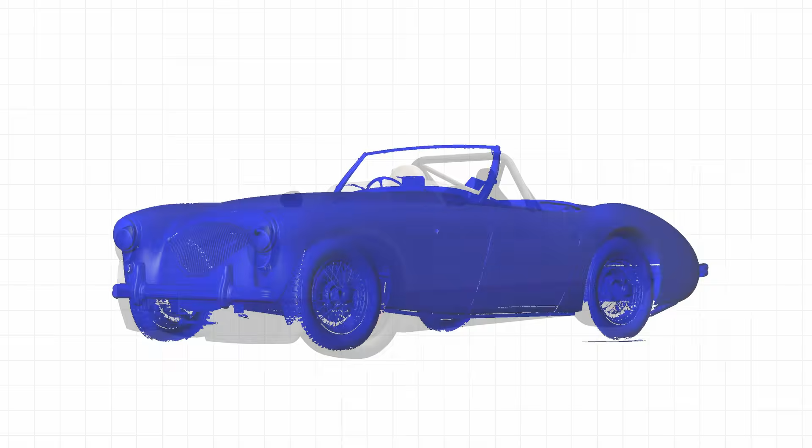G'day, I'm Dr. Kev, and we've been designing a car based on 1950s sports cars. In the 1950s, sports car designers were focused on trying to reduce drag of vehicles. This ended up with streamlined looking cars. But these cars look very different to the cars of today that make good use of aerodynamic tools and analysis. So I needed to know, could you still make a 1950s inspired car that had reasonable aerodynamics for the road?

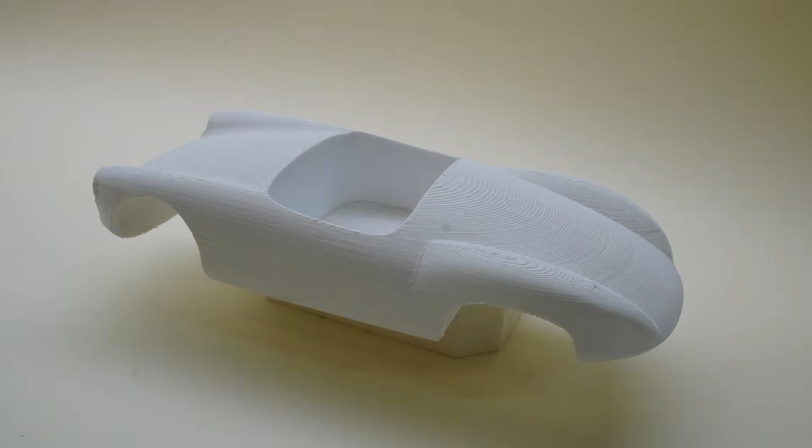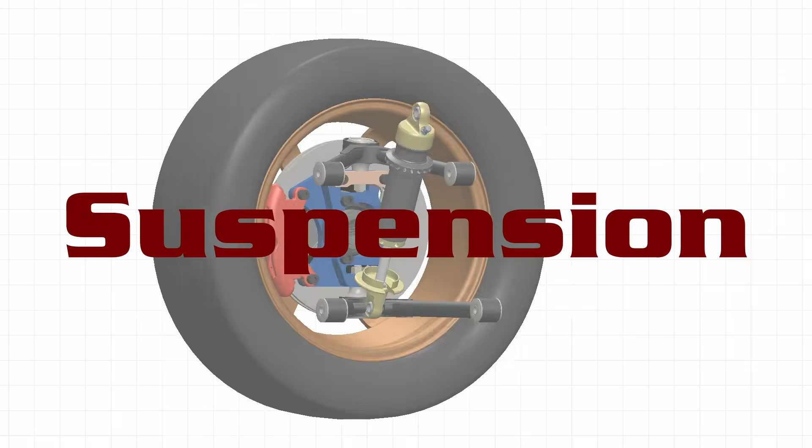Early in the process of designing Project 171, I developed a few car body shapes to investigate whether I could do the modelling process and pull off something that was going to look close to a 1950s sports car. But since those early efforts, I've mainly been focused on the internals of the vehicle, things like the suspension, the structure, the arrangement of all of the components, including things like the ergonomics. I figured that I needed to sort this stuff out before I could go back to working on the bodywork.

There was no point trying to design bodywork with dimensions that were just not going to work with an overall vehicle. The plan was definitely to go back to the aerodynamics and spend a fair bit of time trying to figure out the design of the vehicle, but the plan was to do that quite a bit later. That is, until I got contacted by the good people at AirShaper. Now, if you don't know, AirShaper is a company that offers CFD services online. So CFD being computational fluid dynamics. And this is a way to simulate the aerodynamic performance of your vehicle.

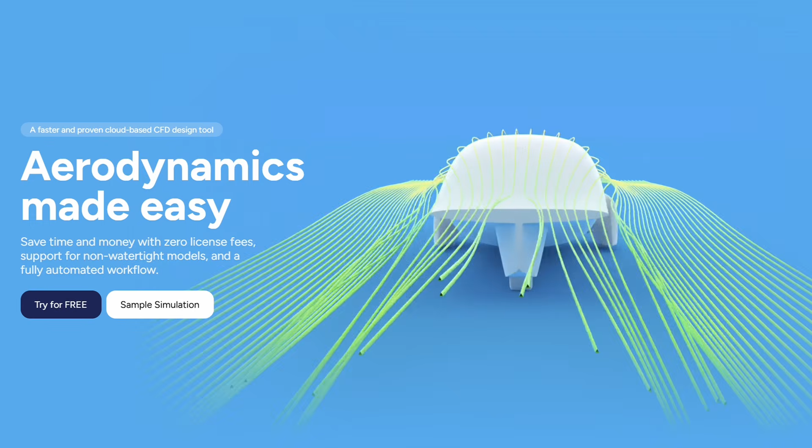If you follow some of the same YouTube channels that I do, you would have seen Superfast Matt has used AirShaper in the design of his high-speed vehicle, as well as Robin Shute with his new hill climb car. I had intended to give AirShaper a go at some point, so when AirShaper contacted me, I thought this is an opportunity that's too good to pass up. The only problem was, I didn't really have a model that was suitable to run in the simulations. A lot of the earlier bodywork that I had created no longer fit with the internals that I'd been working on. But unwilling to let the opportunity pass, I thought, let's give it a shot.

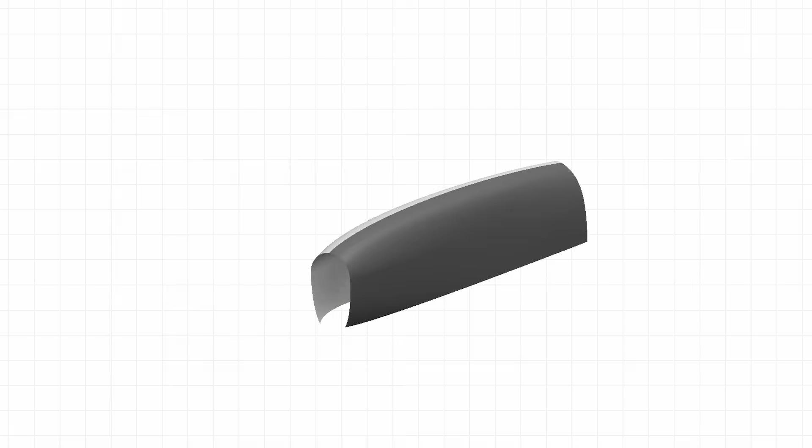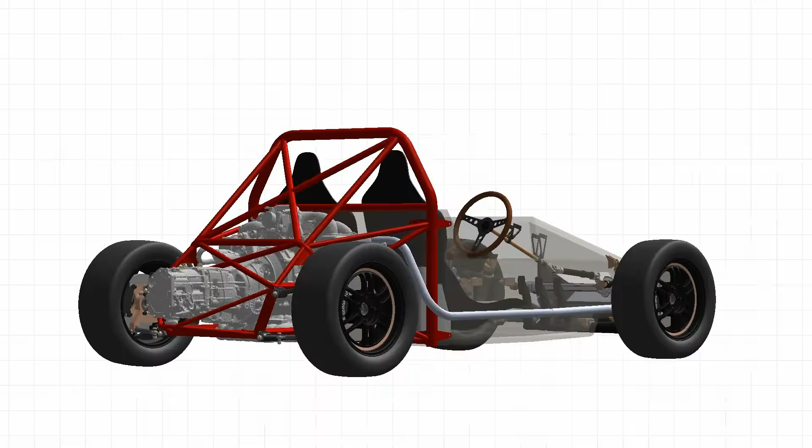So I went away and spent a fair bit of time modeling a body that was closer to where the thinking of the project was at the time. This was informed partly by the scan that we had done of the Austin Healey, as well as the early bodywork designs and the work that we had done on the structure of the vehicle. In a phone call with AirShaper and their CEO, Wouter, I was encouraged to put as much detail in the model as I could. Now, I was fairly doubtful of this. I have done some CFD in the past, and generally, I've had to use models that have got reduced complexity just so you can get a decent mesh.

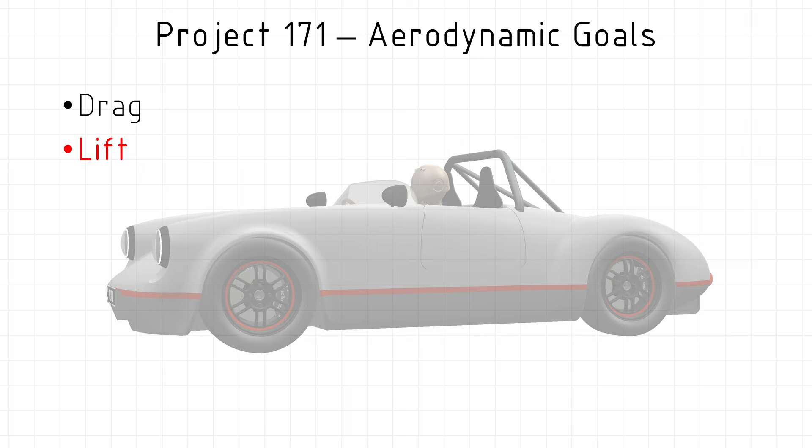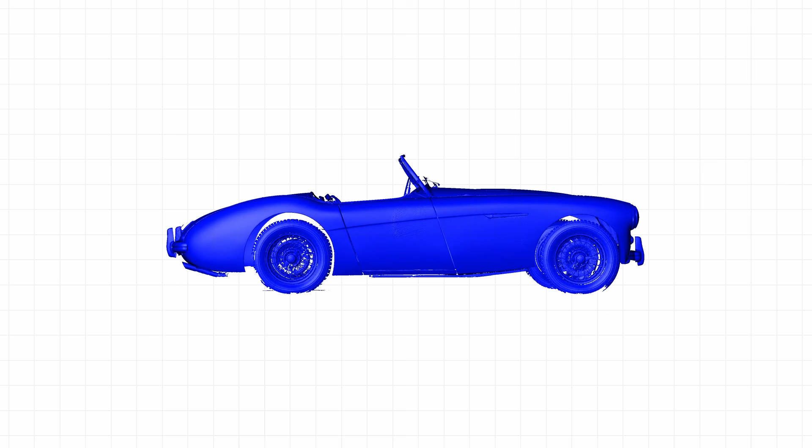Now, I have a few aerodynamic goals for Project 171. If we look at the top level, we can think about drag and lift. I wasn't really worried about drag. This is a car that's not intended to be a competition vehicle, and it should have more than enough power to have reasonable speeds. When it comes to lift, however, I'm a little bit more concerned. So a lot of the 1950s and 1960s vehicles, while they were designed for low drag, they didn't really have much consideration towards lift. And if we look side on, a lot of these cars have the rough general shape of an airplane wing. What that means is a lot of these cars had considerable lift.

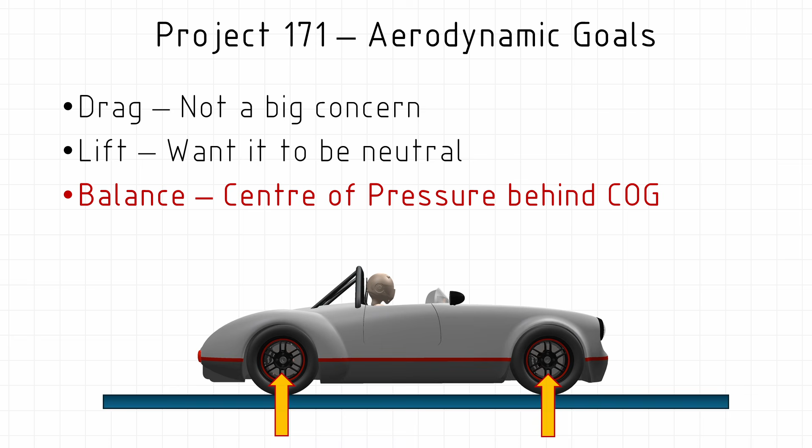Now, lift also has an effect on balance. So if we have a fair bit of lift at the front end of the car, we can lose steering authority. If we have a fair bit of lift on the rear end of the car, then we can have a car that will oversteer at speed and become quite unstable. So when it came to lift, I wanted to make sure that the vehicle was fairly neutral, didn't really have lift, didn't really have any downforce, and if anything, a slight amount of downforce with more at the rear than at the front. Now, another issue that I was concerned about is yaw stability at speed. But this is something I'm going to leave for another video.

Now, one thing I was very concerned with was the noise and turbulence that would be hitting the driver's head. Having gone on long trips in a 1950s sports car, the Austin Healey, it can be quite noisy and you feel a fair bit of turbulence on your head. And this takes away from the enjoyment of the drive.

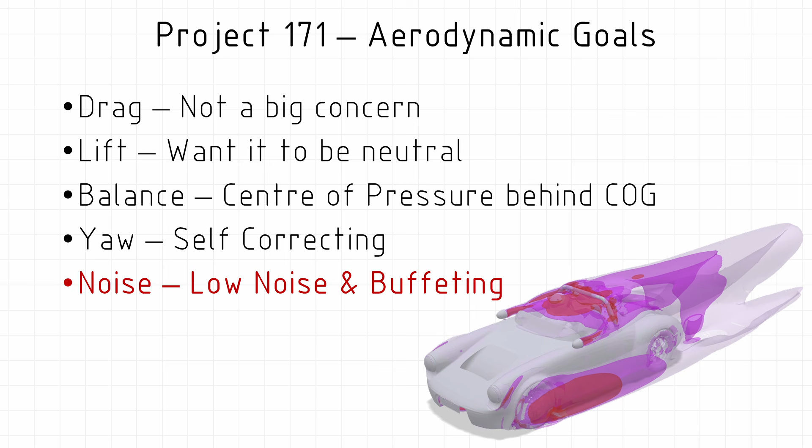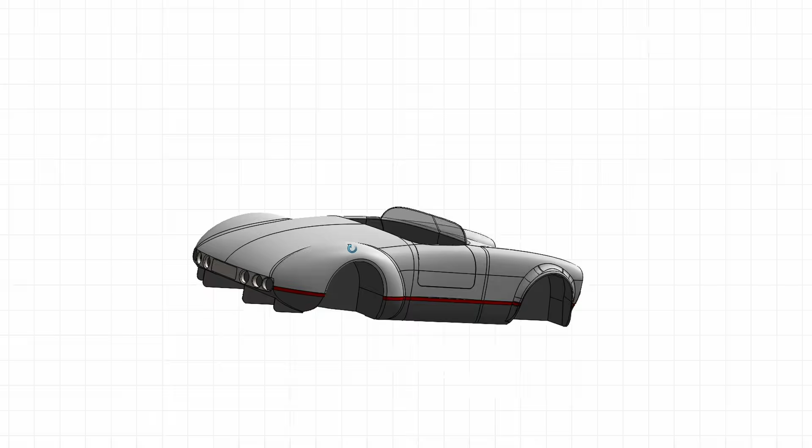So I thought a really good starting use for AirShaper was to see how close was I going to be to these goals. In order to start the process online, they needed to upload an STL. That's a type of 3D model, and it's reasonably easy to export that from SolidWorks. When modeling the bodywork, I did take some time to make sure that it was all watertight and suitable for scaling down and 3D printing. This meant that the bodywork was a reasonably straightforward shape to do some analysis on.

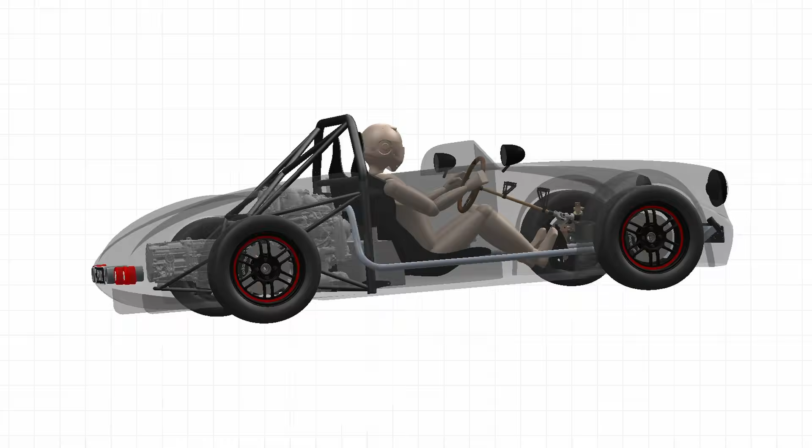But I wanted to test Wouter's claim about just building in complexity. So when it came to all of the other parts of the car, I just exported the STL of my main assembly. And this STL is an absolute jumble. It's got absolutely everything in it. It's got the suspension in it. It's got little pipes that I'd been running, the whole lot. It wasn't a specifically made CFD model. I was fairly confident that I was going to have to come back and simplify this model to make something more suitable to upload.

Once uploaded, there's only one real setup page to go to. You choose the simulation type, so is it on the ground, above the ground, static, moving, is it in air or water? All of that is fairly self-explanatory. And then there's a choice of velocity. Now, given that this is a road car and a fair amount of the time you're just going to be cruising, I thought I just want to see this car straight ahead at 100 kilometers an hour, which is a fairly common speed on the roads around Perth.

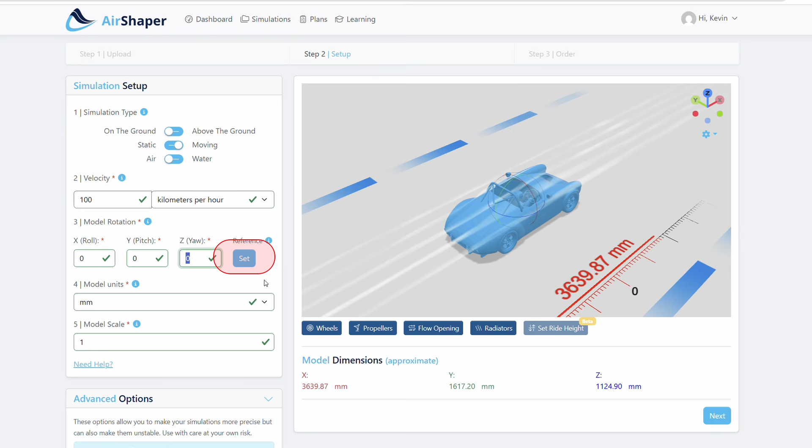Now, when I had imported it, the car was facing the wrong way. So I needed to rotate the model. Now, it's pretty important that you set the reference of this after you've rotated. And I can't tell you exactly how I know this, although I do have results of the car traveling backwards. The only other things are model units, so millimeters, it's the only real unit that makes sense, and the overall model scale.

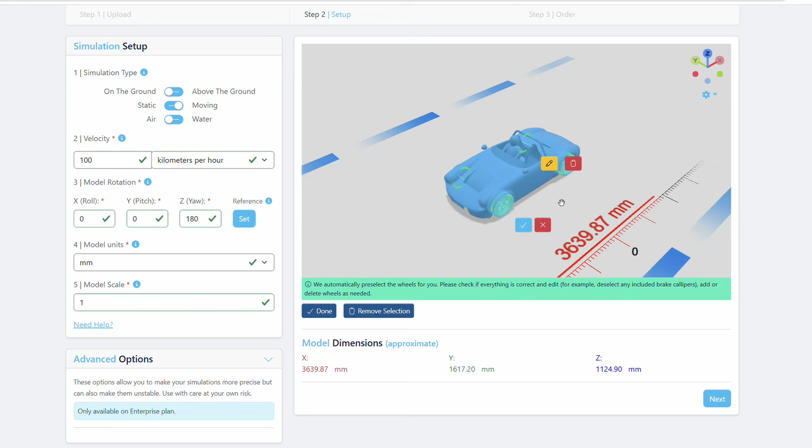Now, there's a couple of other things that I wanted to define. First, that this will be able to auto-detect wheels. Now, as I said, the model as it was uploaded was pretty complex. It had the suspension and everything in there, and I was fairly doubtful that it would be able to pick out the wheels reasonably easily. But I was pretty surprised. It was straightforward, selected the wheels, rotating in the right direction, and rotating at the right speed.

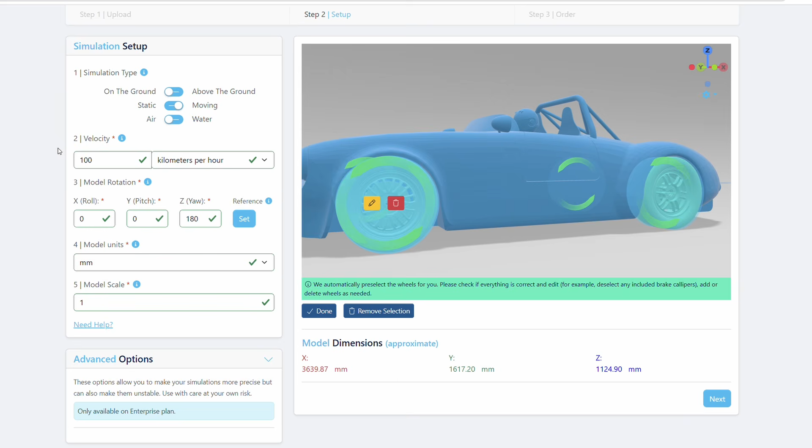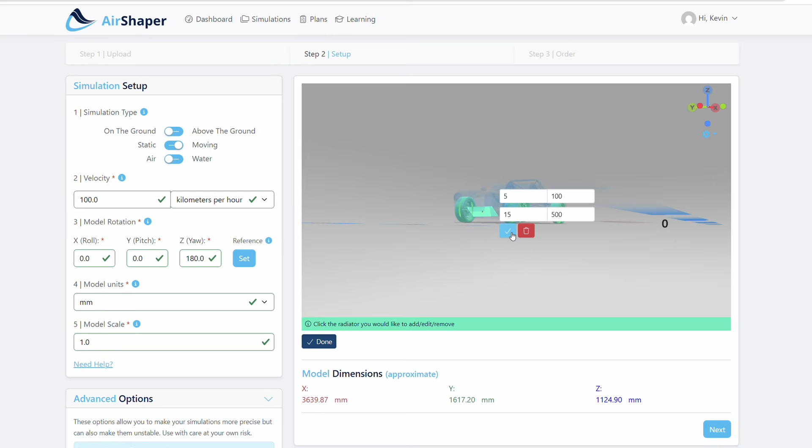Now, the only other thing that I wanted to define was the radiator at the front. I was fairly keen on seeing how the air would move through that ducting, especially how it would interact around the windscreen and driver and so on. So for this, you need to define two velocities and a pressure drop for each. I didn't have very accurate numbers there. I just went on something that seemed reasonable from the internet, but that's something that'll have to be updated as we get a bit more detail on what the radiators are likely to do.

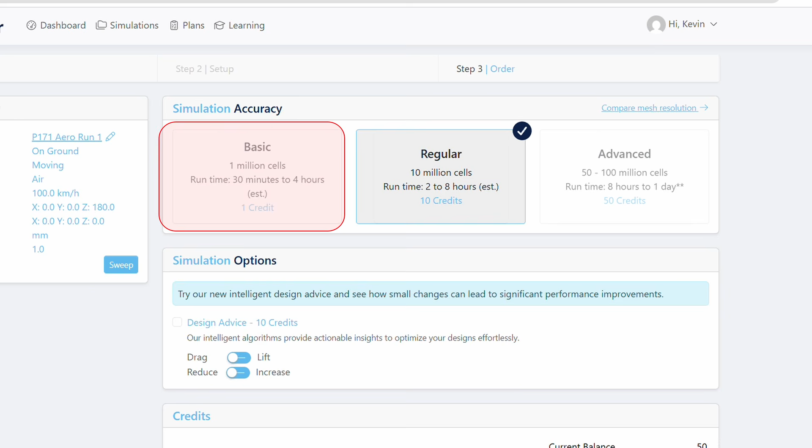The next step is to order the simulation. And there's a few options here. So there's a basic accuracy, a regular accuracy, and an advanced accuracy. And each of them costs a different amount. So a basic run is 1 credit, a regular run 10 credits, an advanced run 50 credits. And that is based on the number of cells in the CFD. These number of cells is how much the air is broken down into. If we break it down into more cells, we can get a more accurate simulation.

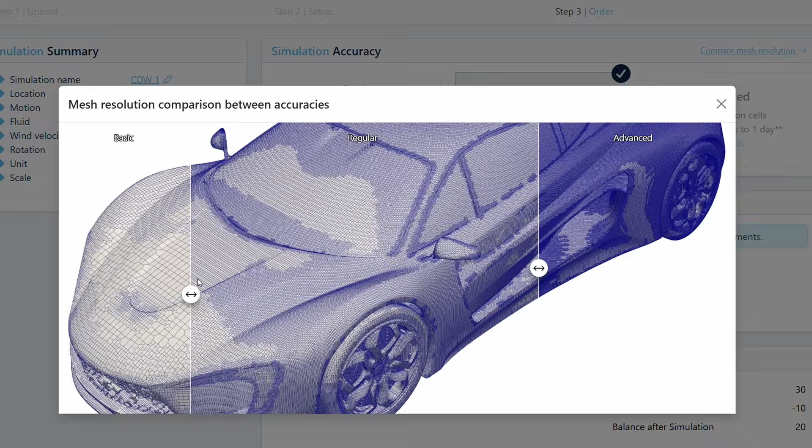Now, given there was a fair amount of detail, I thought I'd go with a regular run, also noting that this is pretty early on in the design process, so there wasn't really a need to waste the resources of doing a particularly long run. Now, I probably could have got away with using a basic run at the beginning, but I really wanted to see what this software could do. Now, there was another option, which is to do some design advice, and that's where you could get the software to tell you what areas of the geometry need to change to reduce or increase drag or lift. So I just kept it simple, put it on regular, started the simulation.

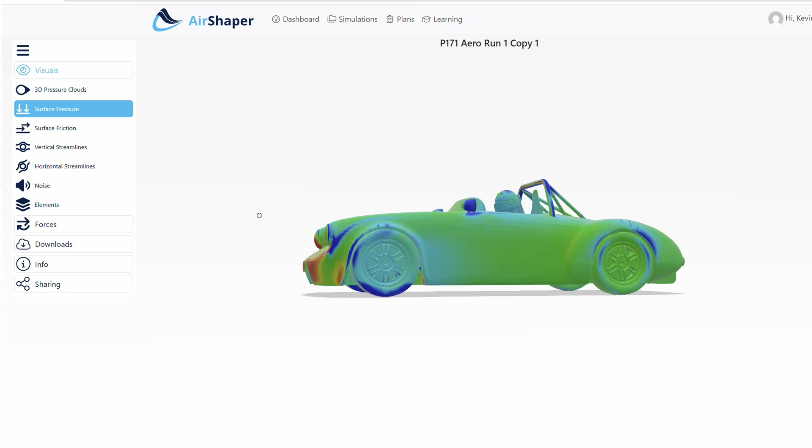Now, this is a pretty complex calculation and it takes a fair bit of time, and the run time for the first simulation was between 2 to 8 hours. And when I opened it up, I couldn't believe that it had just worked. All of the issues in the past with CFD have really involved trying to get a decent mesh and getting that to run. This just worked.

It had rotating wheels, it had a radiator in it, it had reasonable results. Having done this sort of stuff in the past, this just blew me away. And there's pretty good results that you could view once your simulation is complete.

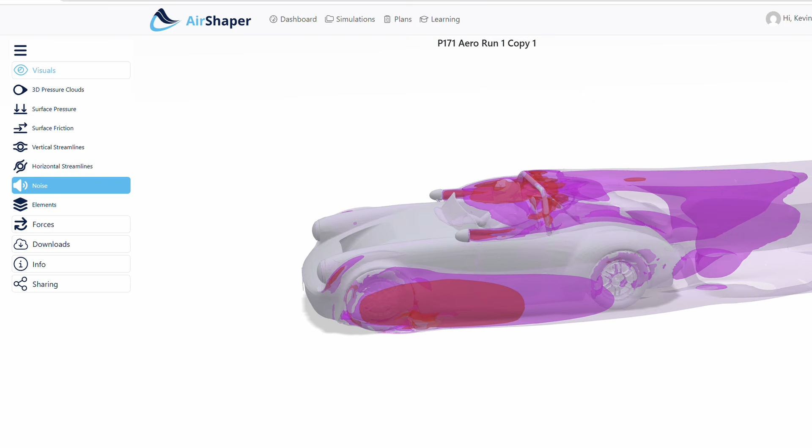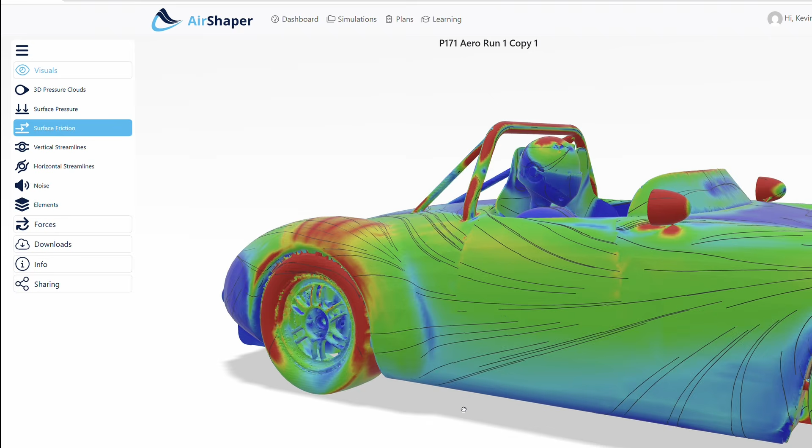If we look here, this is the surface pressure, and this is showing areas that have high pressure and areas that have low pressure. We have surface friction, and we can actually see how the flow is traveling over the body of the vehicle. Now, this would be really good if we start to look for areas where there might be separation or sort of laminar flow and start to do some on-car testing once this thing is completed to see whether these patterns are matching up in real life.

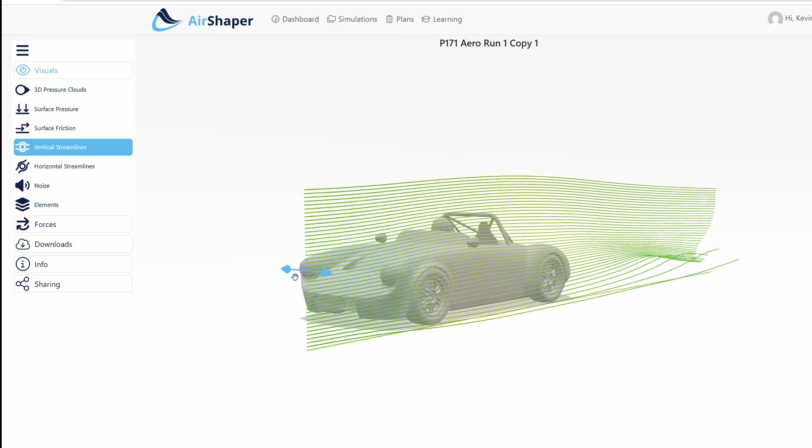We can show some streamlines of this and how the air is traveling. Well, this is an area where I'd really like to just be able to select something like the radiator area and just show the streamlines for that. Otherwise, with this resolution, it gives some idea of what's happening. You can see some areas of separation, but I didn't find this to be as useful as some of the other outputs. Now that can be done both vertically and horizontally. It does give you a good idea of where the air is traveling.

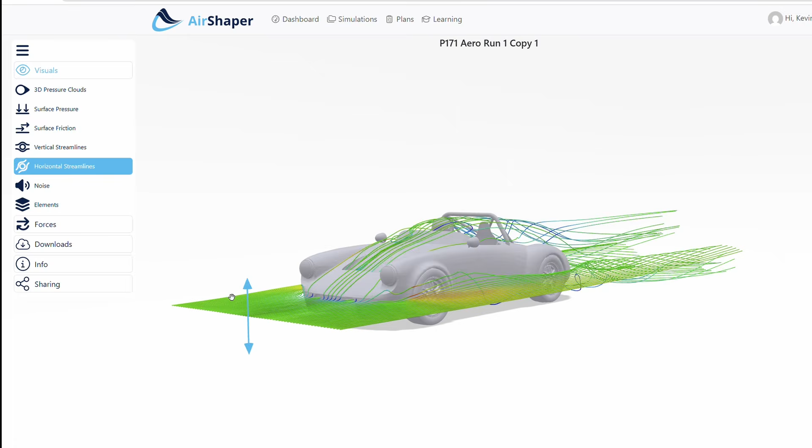Now of more interest is the 3D pressure clouds and the noise. So we see with the 3D pressure cloud, this is showing regions where there's a big transition to a low pressure region. And we see that the noise is actually doing a similar calculation of this. So this is a static simulation. So the noise here, this is an approximation of the noise, but it gives you an idea of where the noise is going to be.

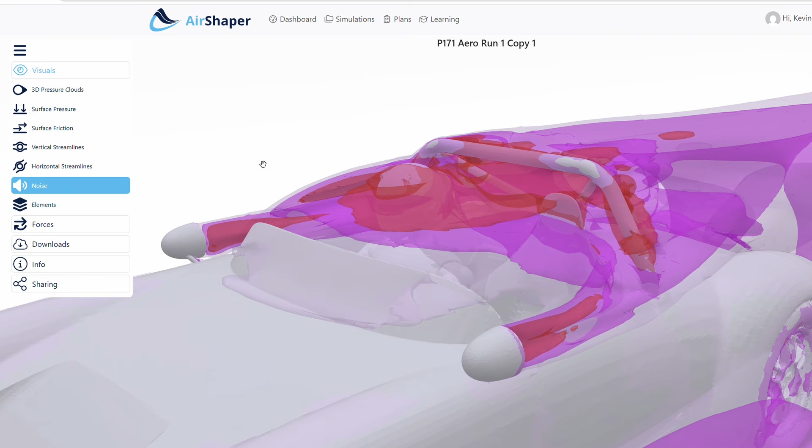And unfortunately, one of the design goals was to try and avoid noise being at the driver's head. And if you look here, the driver's head is right in a big mess of noise. In fact, if we go back to the surface friction thing, we also see a fair bit of surface friction on the driver's head. So yeah, not a really fun experience for the driver in this car at the moment. So something to work on.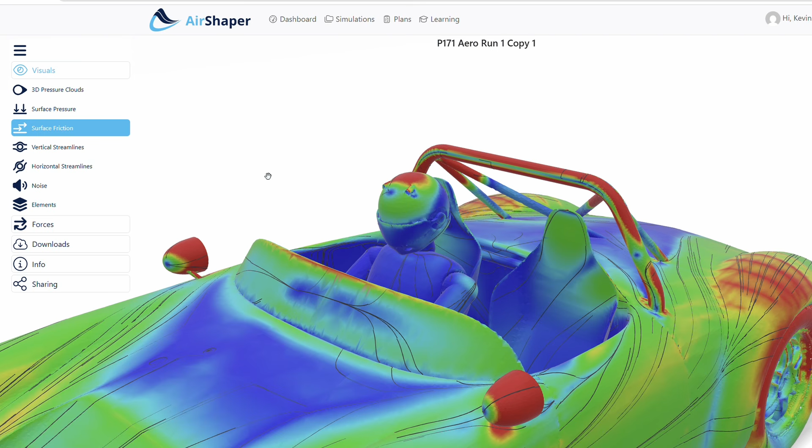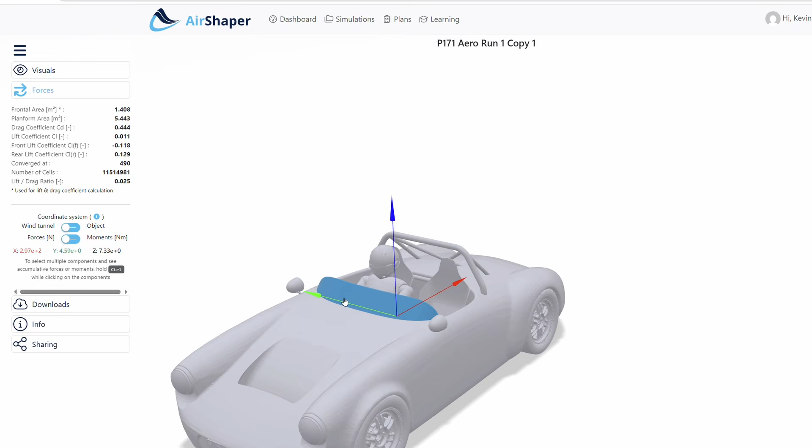The other thing that we see is some basic numbers, some basic forces. This gives out a frontal area, planform area. We also see a drag coefficient and a lift coefficient. And that lift is broken up further into the front lift coefficient and the rear lift coefficient. So we see where it's converged and the number of cells. So we see in this run, this was 11.5 million cells.

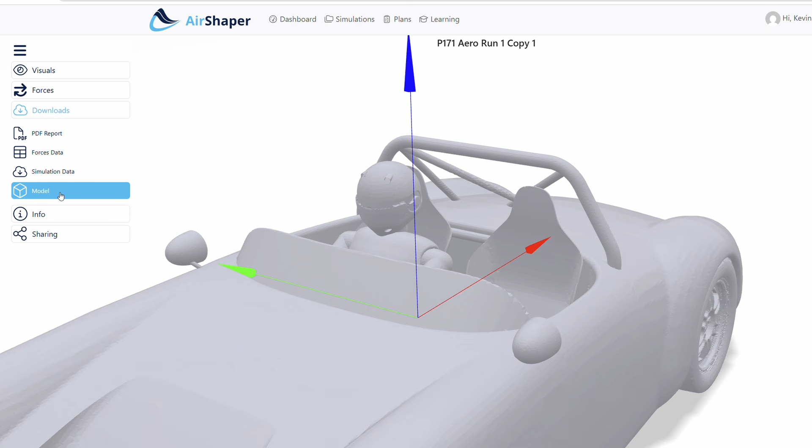Now, one thing that's really cool with this is we also have forces that are shown, and we can do this for individual elements. So for instance, I can grab the helmet of the driver and see what is the force that's being applied there. And we see overall a fairly low drag force, although it is noted that this is sitting in a really turbulent region. We also see that there's a bunch of things that we can download here. There's a PDF report that we can get all the simulation data and force data as well as the original model that was uploaded. And this is where I was once again impressed.

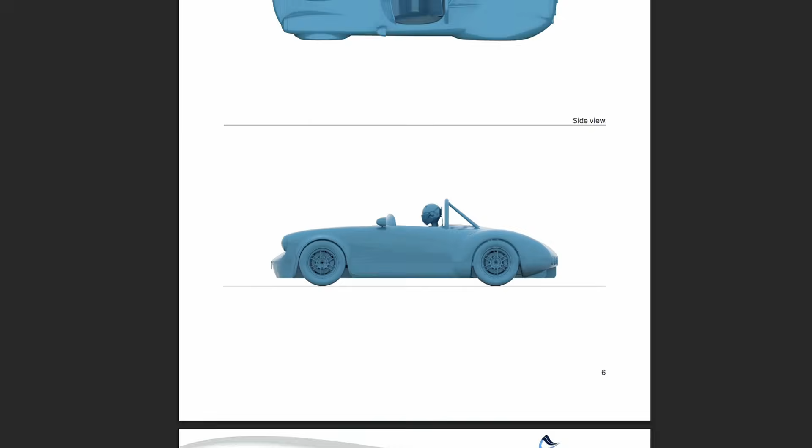See, in the past, a few friends and myself were running a company where we would do finite element analysis and other engineering design and so on for people, and we would produce engineering reports of the results. Now they go into a fair bit of detail, and these reports were largely designed for engineering companies, but I know how much effort goes into creating a well-presented report that clearly summarizes results.

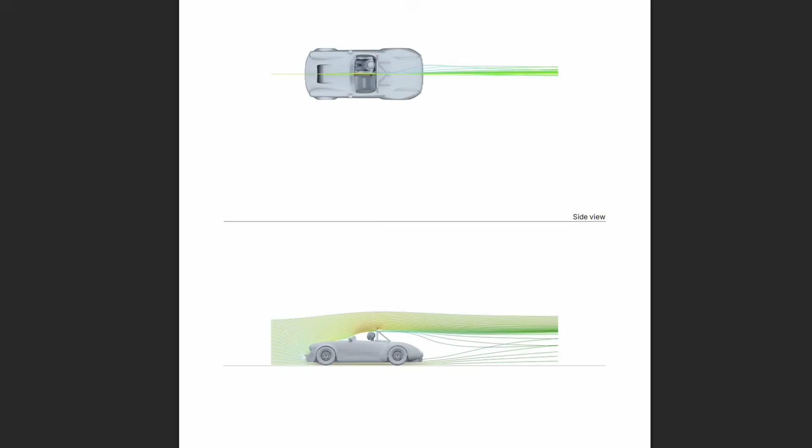And I was blown away by what I saw from AirShaper and the fact that this is a nice standard report. It gives all of the basic details of the simulation, so everything that was included in there, the type of solver, turbulence models, number of cells, and so on. And we see the basic views of the vehicle. So this is really just showing and running through how was the simulation set up.

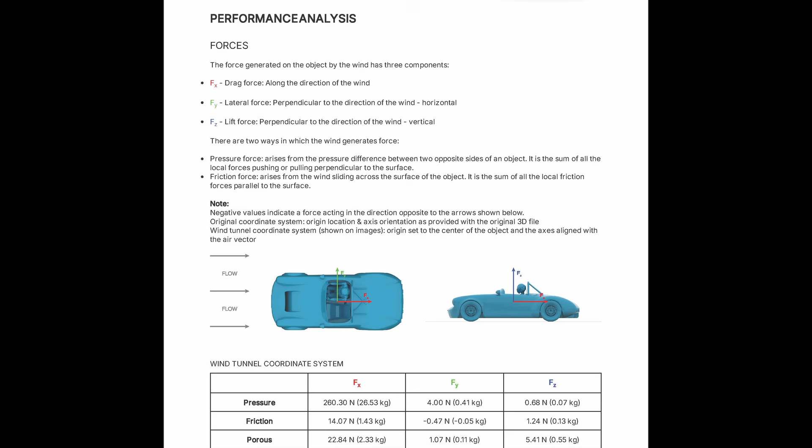Then there's a performance analysis, and this is telling you what each of these things means, as well as giving the results. It gives some details of the simulation, so it is showing some of the convergence. Now, I would like to see some details of the mesh, but I fully appreciate that that's a very difficult thing to automate. Given the model, you might just want to zoom in on certain sections to show some of the mesh details that would be different from one model to the next. So it's not really something that could necessarily be put into an automated report like this.

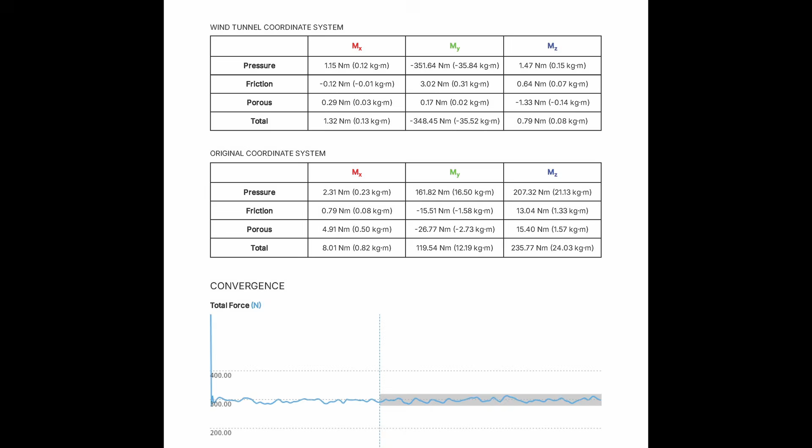Now they do provide the opportunity to output data that you can then open in ParaView, and that's something we'll look at a later date. It also provides some comparison.

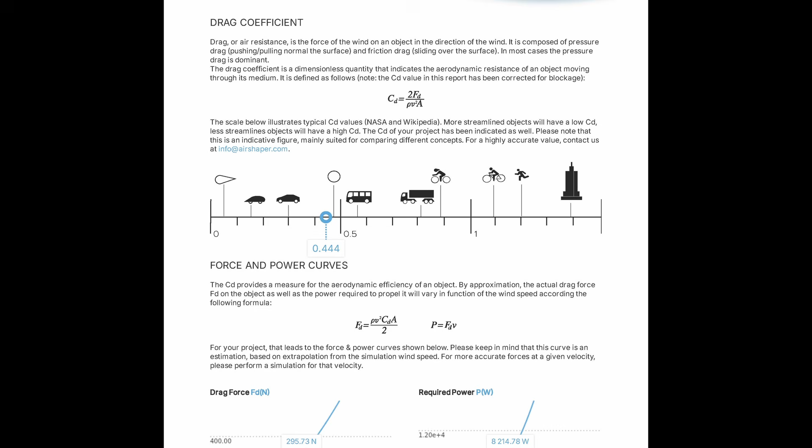So we can see that the drag coefficient actually says that Project 171 is closer to a bus than it is to a car in the way of drag, and gives an idea of the required power. So we see 8.2 kilowatts to overcome just the aerodynamic drag at this 100 k's an hour.

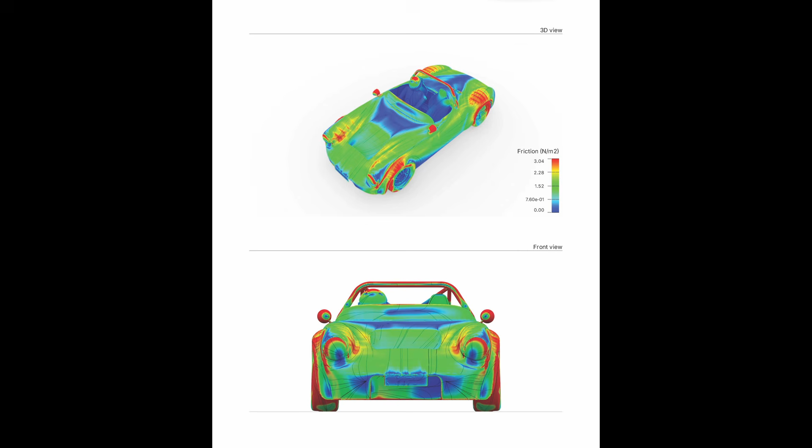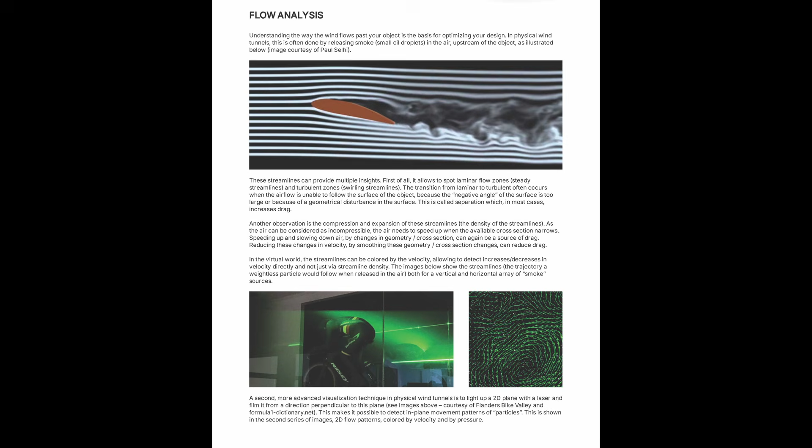And then there are some standard views of each of the graphs that are provided online. And this is very similar to how we would present results if we were doing an internal summary of aerodynamics for things like the Formula SAE car that the students would work on. It also gives you a little bit of an idea of how flow analysis is done, providing some pretty cool images to help with that, and then showing those streamline images.

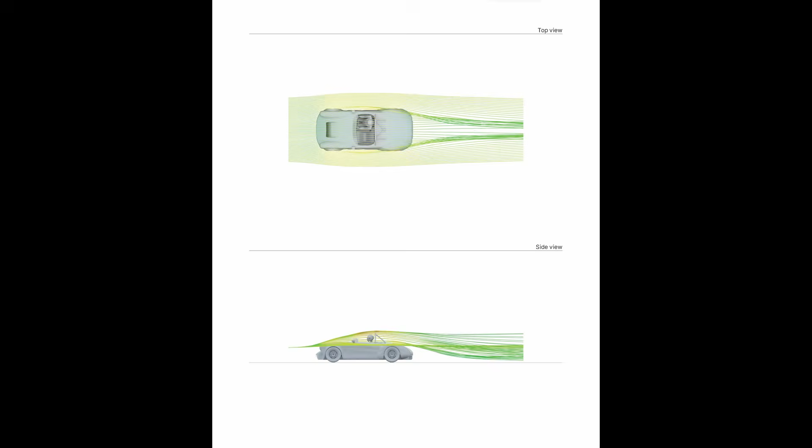Now, for this project, those streamlines just didn't have the depth of information, but for some projects, it'd be really, really valuable, especially in a closed roof car. But in this, it's just a pretty dirty vehicle aerodynamically, given that it is open top. And so there's a lot of things that are disturbing flow. So we're not seeing that those streamlines are getting reattached. But you can't doubt that these images look cool.

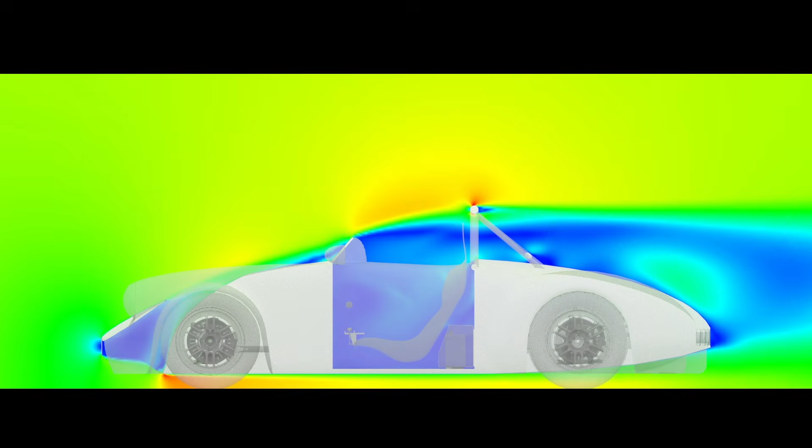We also see some section views, which are pretty handy. And I think these 2D velocity sections are giving that information that wasn't really there for this model on the streamlines. And you can clearly see some of this area of separation. Now, I was pretty impressed with the images that were chosen for the noise and how they were presented. And you can clearly see the problem that we've got with that noise and turbulence around the driver's head. So there's a lot we've got to do with that windscreen area.

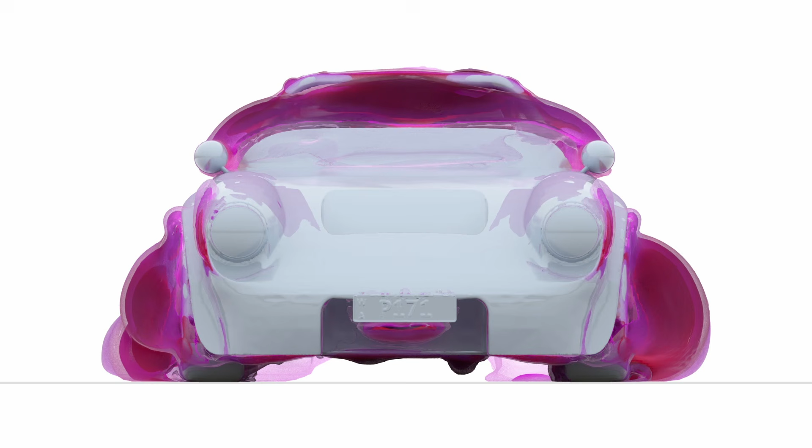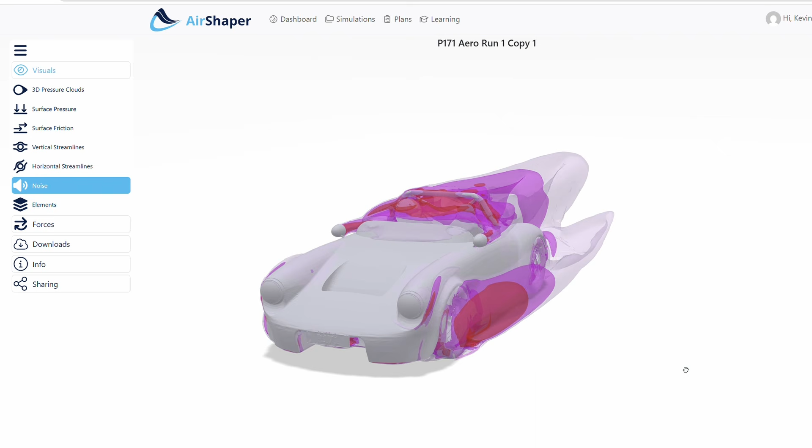Now, to my mind, if all you got out of an analysis was this report, it would be well worth it. There is so much information here, so much to go by. The fact that you can go online and zoom around and look at all the little details, it's just so much information that you have access to when you're finished. And that's not even going into the fact that we can then open this up in ParaView and do whatever we want with the data. The data file for the full results is 1.6 gigabytes of data.

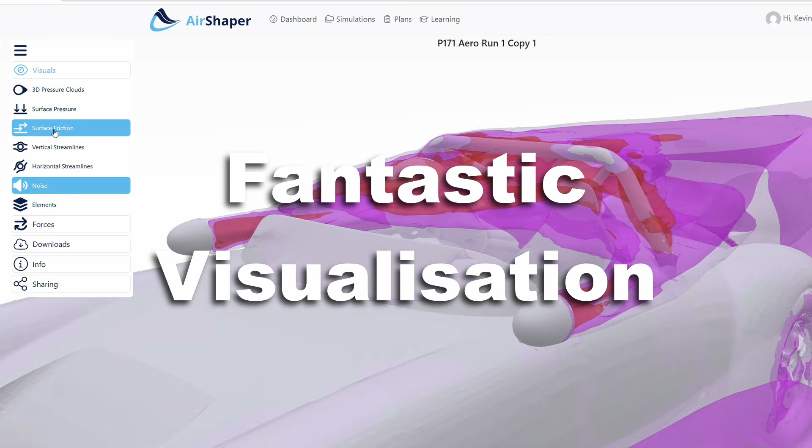So it's been a really easy setup, no problems at all in the calculation, and fantastic visualization of results at the end. Now, as soon as I reached this point, the first thing I wanted to do was go back in and make some changes. You wouldn't believe how much self-control it took to actually sit down and try to make a video over this, rather than just get in and start playing around. But it is worth taking some time and saying, did we hit the goals that we're after?

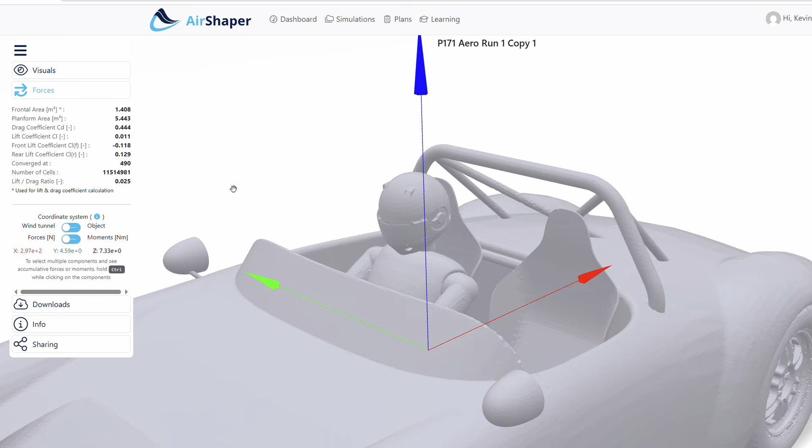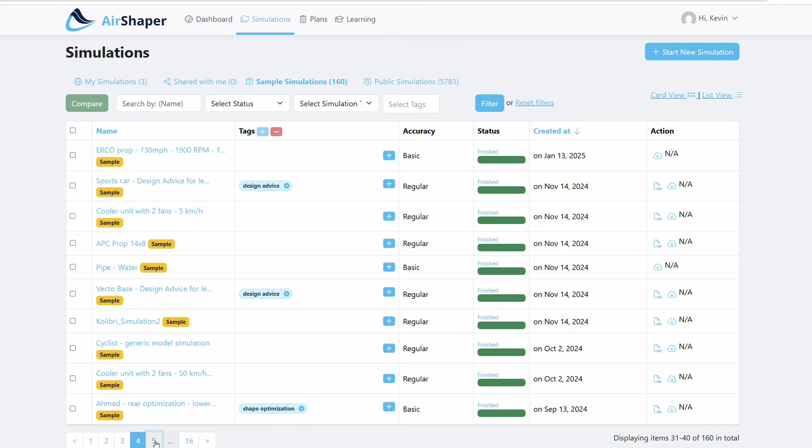Well, I thought to start with, I might just use some other information that AirShaper had made available. So when going through to the simulations, not only do you have the simulations that you've run, they provide a whole heap of sample simulations and public simulations. There are so many results that you can have a look at. So what I thought I would do is go through those sample simulations and have a bit of a look at them. So I went through all 160 of these and looked for the ones that were cars.

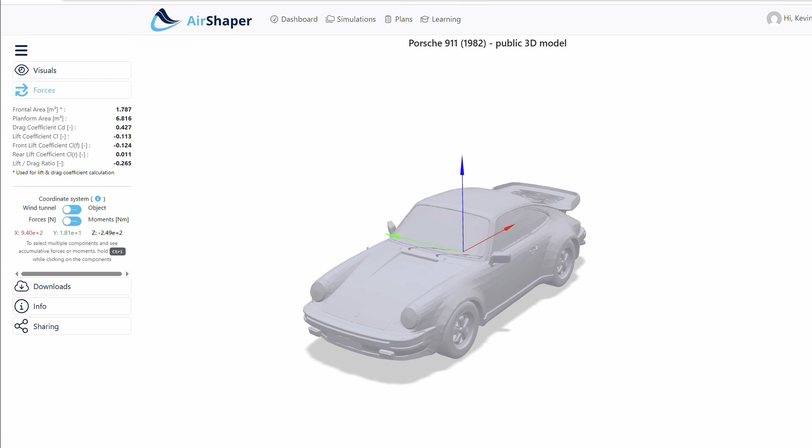And for every car that I found that was a unique one, I grabbed its details. So what was the coefficient of drag, what was the coefficient of lift, frontal area, and so on. And I could see, where does Project 171 sit in relation to all of these other vehicles? So plotted here, I have a series of points that are all of these vehicles. And this is showing their lift versus their drag. And you see that Project 171 is sitting right in the middle.

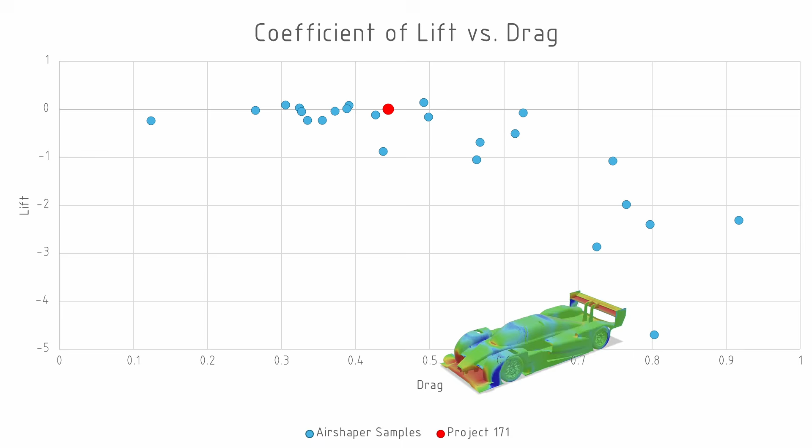Now this fella over the left, that is Superfast Matt's car. Very, very low drag. It's built for really high speed. This little fella down the bottom is a prototype sports car. So this looks pretty good. And the numbers suggest that. The drag coefficient was 0.44. The lift coefficient was 0.01. So this is really good news.

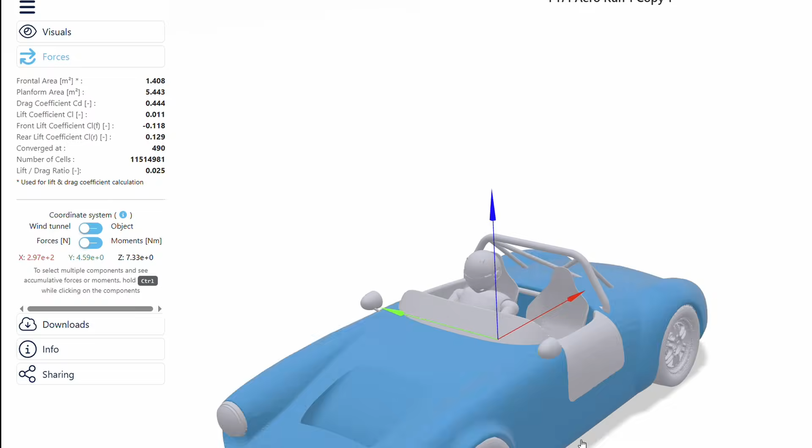I wasn't too worried about drag, but I did want the lift to be roughly neutral. The downside is there is a slight amount of lift, but this is pretty insignificant. What was a little bit more worrying is the front had downforce, but the rear had lift. Now the front has a downward sloping region, as well as a cooling opening that's picking up a fair bit of flow.

Now, one good thing from this is it doesn't look like we're going to have an issue getting the front lift coefficient where we need it to be. It's already got more than we need in terms of downforce. We might add a little bit to clean things up and get the flow a bit more improved as it goes over to the back, especially the underside of the car. But otherwise, it looks like this is not going to be a front limited vehicle.

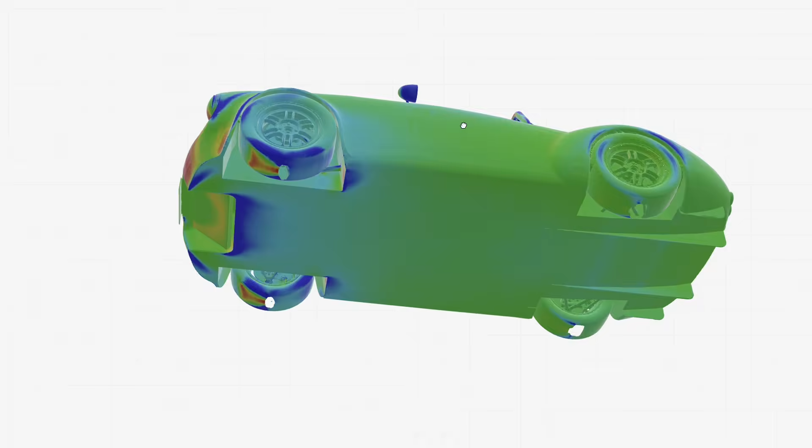However, the rear has lift. Now this is because we've got some fairly curved arches over the rear wheels, and these curved surfaces on the top are going to provide lift to the vehicle. Now I was trying to counteract that by putting in a bit of a diffuser, but really this diffuser's not working. And that's probably because we're getting a lot of leakage from the rear wheel well into this diffuser section, as well as not really having a lot of depth there anyway.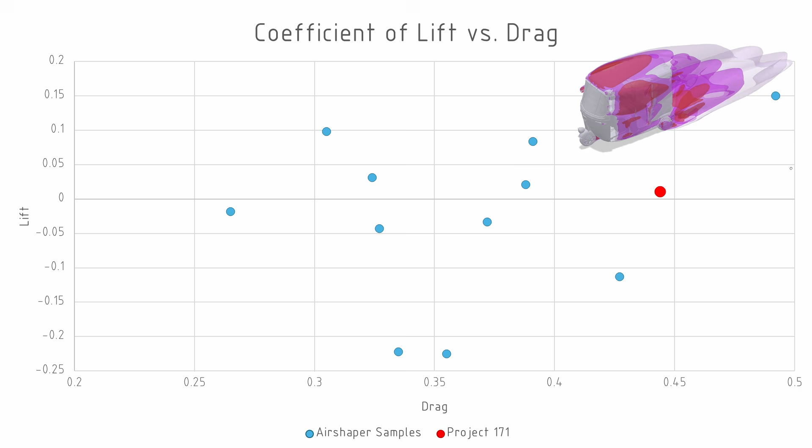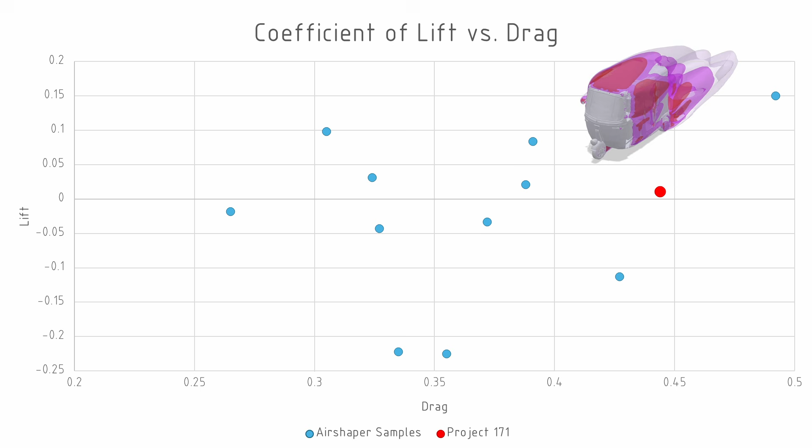And if we remove all of the motorsport orientated vehicles, we end up with this. And here we see that Project 171 against all the other cars there, it's pretty horrible when it comes to drag coefficient. In fact, the only car that was worse was a tuk-tuk. Now, admittedly, all these other cars were closed vehicles, but it looks like Project 171 is horribly inefficient in drag. Except, that's not the whole story. You see, there's one thing that goes in Project 171's favor.

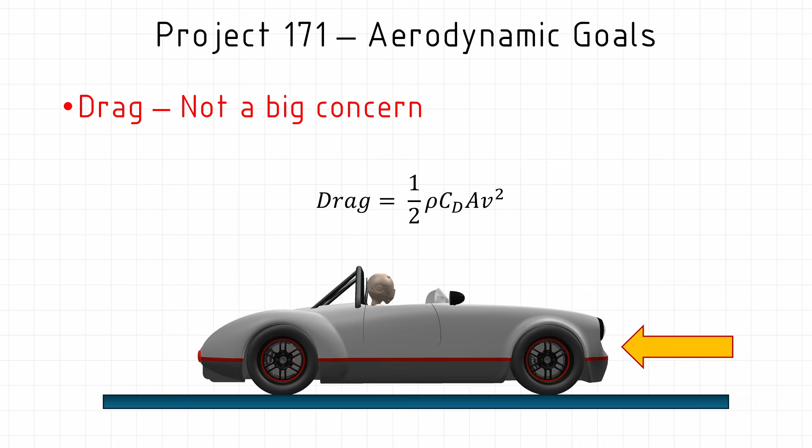Now, if we look at the equation for drag, the drag force is a half rho, so that's the density of air, times coefficient of drag, times frontal area, times velocity squared. And this is where Project 171 does have a pretty good advantage. It is small. In fact, if we compare it to a scan that we took of me a while ago in a previous video, you get an idea for the scale of this vehicle. This is a small car.

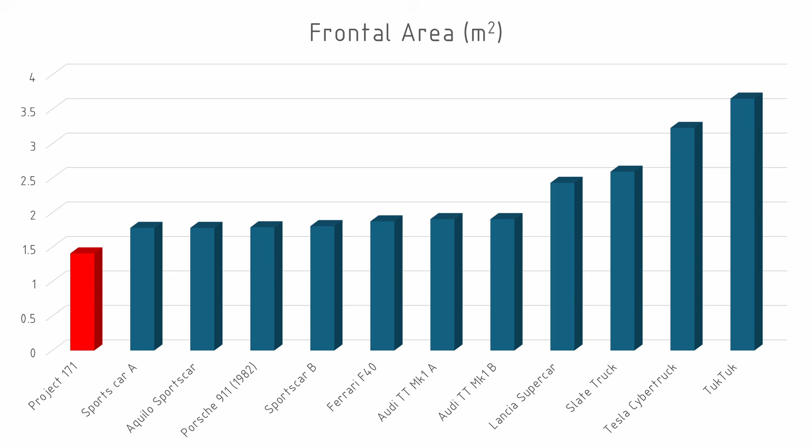And if we show the cars that are collected there and we show their frontal areas, Project 171 is smaller than all of them. So if we show the lift and drag forces at 100 kilometers an hour, we see that the car's actually pretty good. Not great, but pretty good. But there are plenty of areas where I think we can reduce drag, improve our lift and balance without really compromising the appearance of the car. So I'm pretty excited by all of this.

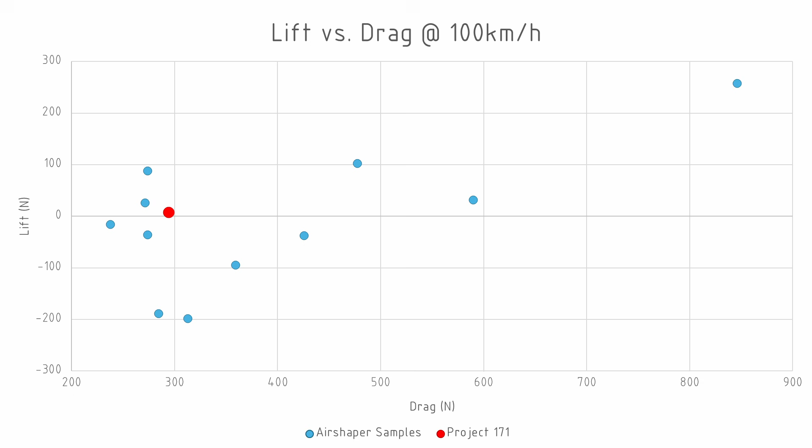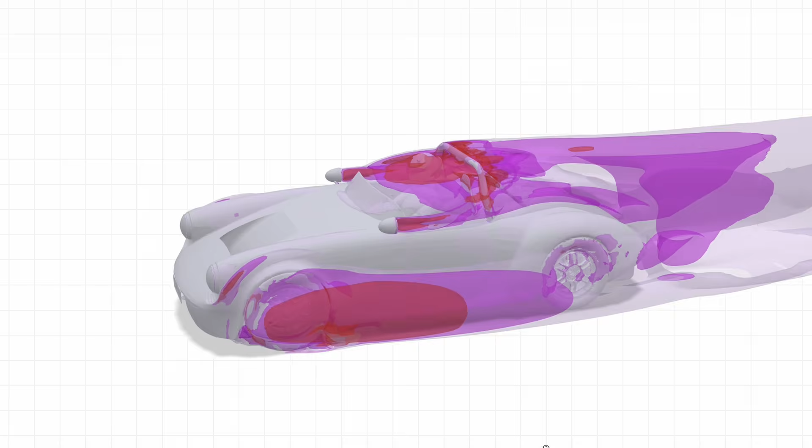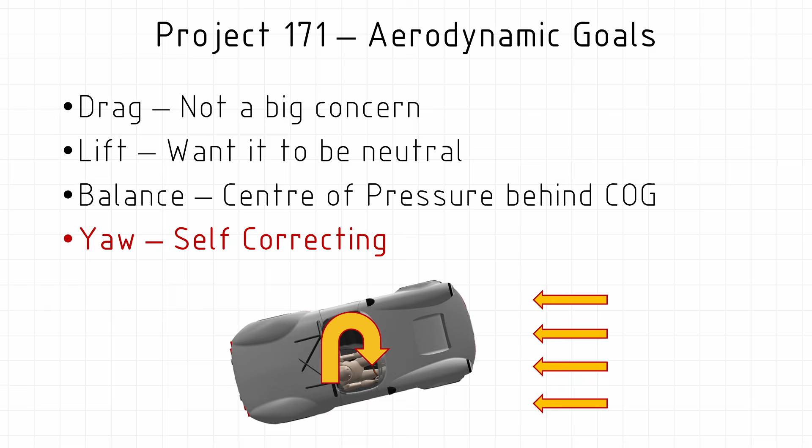Now I do plan on doing future runs. Clearly, the noise around the driver's head is a big problem. And another thing that I need to have a look at is the yaw stability of this car at speed. That's something that I think I've experienced as being a problem in the Austin Healey. Another thing to do, just with these results, is to have a look at a few more details of what we've got in ParaView. But I'm going to leave that for another time.